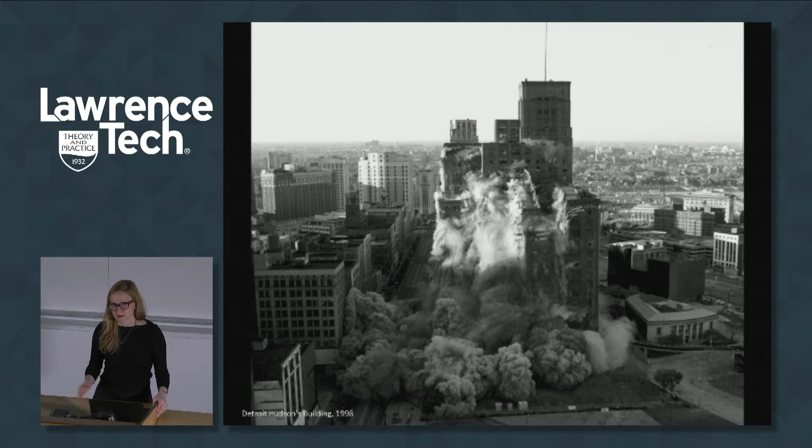For those who remember or read about it after the fact, it was a very public event. The mayor at the time imploded the building, it was televised, celebrated as a Renaissance, Detroit Renaissance. But the building itself was a very strong cultural icon in the city, a huge department store site, and the site of the Thanksgiving Day Parade named after it—it had a real cultural legacy.

So when that was gone, this was what the city looked like when I left, around 2007-2008. That site was supposed to be the sign of a kind of rebirth of the city, a new investment in what the city could be, but it stayed empty for a very long time, and looked like this for years.

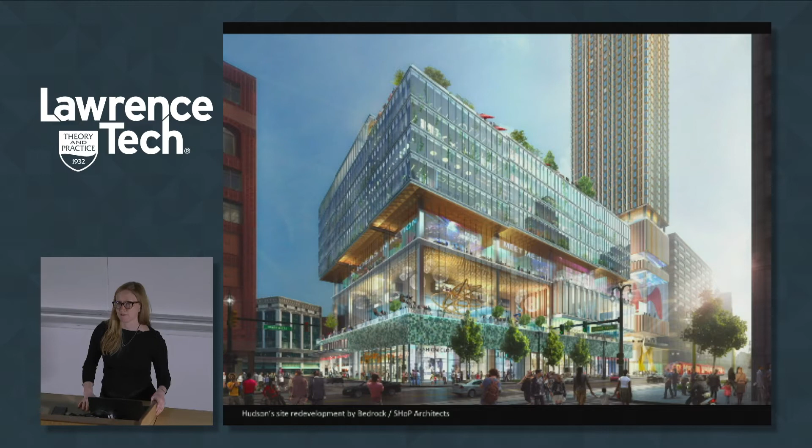Until very recently, when SHoP and Bedrock are developing now a plan for its regeneration. So the city goes from looking like that empty image when I left to almost the same view now, albeit through a rendering.

This is one part of a much more complex story having to do with industry and decline of industry, and a sort of perfect storm of things happening over the decades of the 20th century. I think Detroit became so interesting for people because it was such a rapid transformation, and it's coming back for me now—it's almost a different city, the way the development has caught up to that ambition of 1998, 20 years ago.

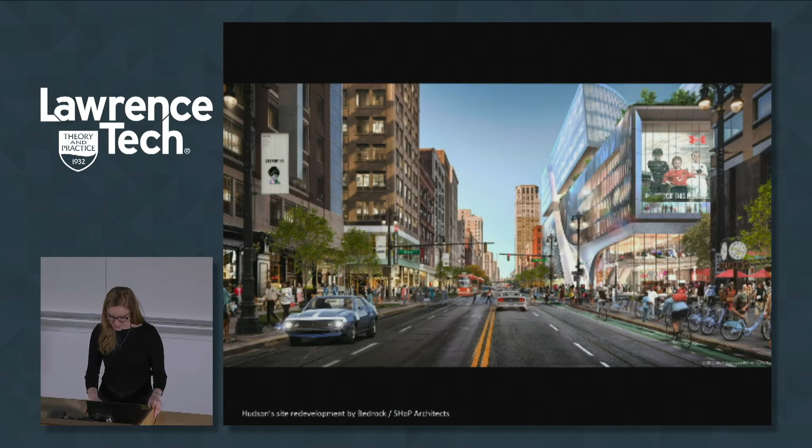So I've been thinking about that quite a lot, and then I got to Melbourne. Melbourne was interesting to me because for 7 years in a row, Melbourne, Australia got—I can't remember who gives this award—but the world's most livable city. It was always Vancouver and Melbourne competing for that title.

There were all these successes of the city in terms of culture, education, and design—they often call it the design city. There's some really interesting architecture, really experimental projects. But there was a study done about 2 years ago by someone working for the planning department of the city, worried about this boom and what it was going to do to the prized livability that Melbourne always defines and brands itself by.

There are sections of this part of the city that are more dense than Hong Kong, partly because there was very little, if any, planning regulation, apartment regulation, or regulation of the quality of buildings and living spaces. None of that was really regulated until this time—so it just took off.

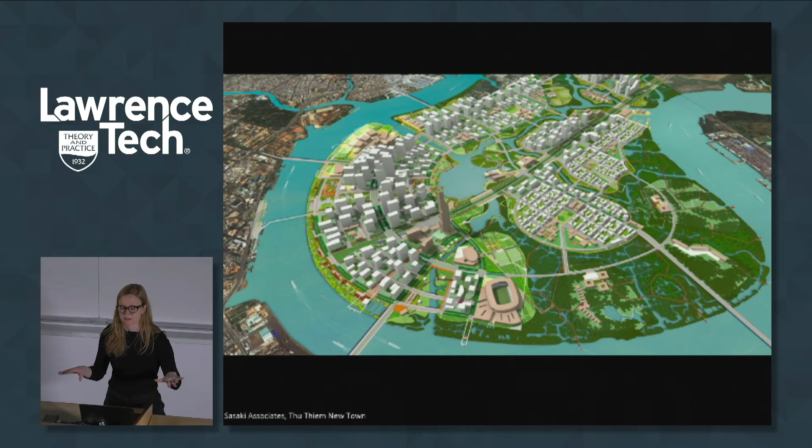So the new models of development are very much imported - Sasaki, SOM, Singaporean, Japanese planning firms. The model for the new Ho Chi Minh City is quite explicitly Singapore. I don't know how many of you know Singapore, but very, very organized and very new. Everything is sort of just - these are greenfield sites - so it's just razing essentially what's there and building everything new.

And the architecture is of a sort of podium tower type, really nothing to do with some of the existing systems of the city that are there, which isn't essentially a bad thing, but it does create problems when those two things come together.

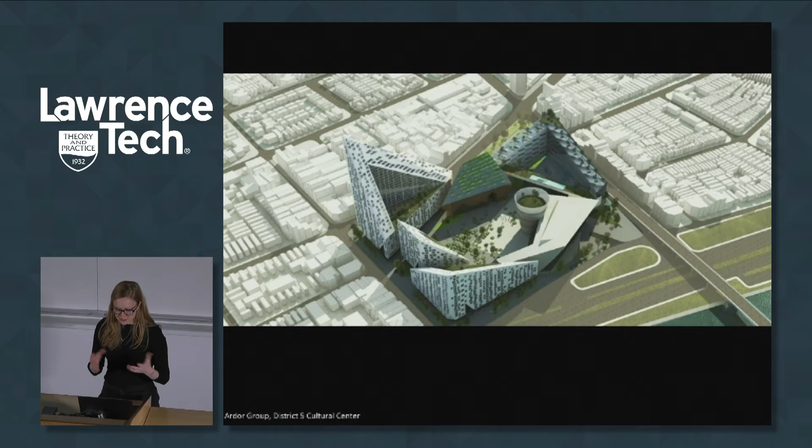So these are these new models. This is all sort of happening right now, which is why I spent about 2 years living there and was traveling there quite a bit before that, and have seen - not unlike how Detroit has changed - Ho Chi Minh City in the past 5 years has changed quite a lot.

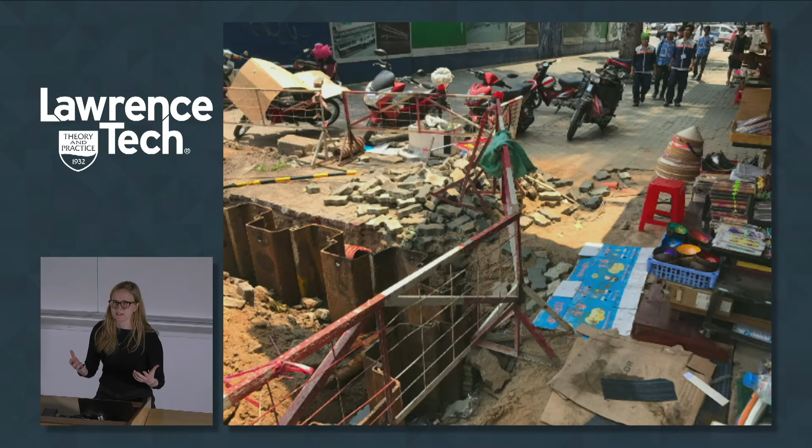This quality of unfinishedness - the more that there's potential for these, the more that it changes, the more potential there is for new models of architecture at an urban scale to intervene.

The sort of irony in the case of Ho Chi Minh City that I find interesting is that as this development is happening, there's an incredible amount of demolition.

It's sort of the opposite of Detroit, where the story people want to tell so much about Detroit is its decline, and it's that thing about the industry that built it being the thing that undermined it. Here, the quality of its demise has now become the thing that's going to save it. It's become a marketing and branded condition. There are many examples of this because there's so much retail, commercial, and art space coming into the city, which is not a bad thing—it's just a bit ironic, the subject matter it's now displaying as itself.

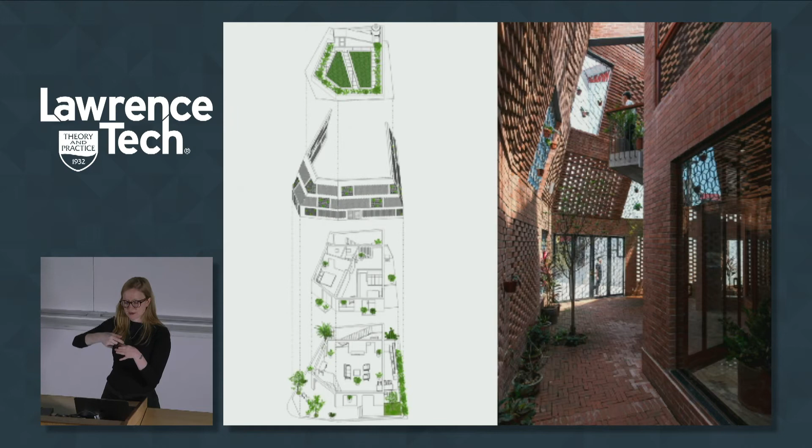So this is a building within a building where they've taken basically one shape and wrapped the inner building with an outer surface, and you get this gap. I could show you actually in plan - there's the site. You have basically one surface that wraps around itself and then is effectively extruded up. The outside is tipped in a bit, so you get these gaps essentially between the outer shell and the inner shell, which is a way of establishing a kind of privacy.

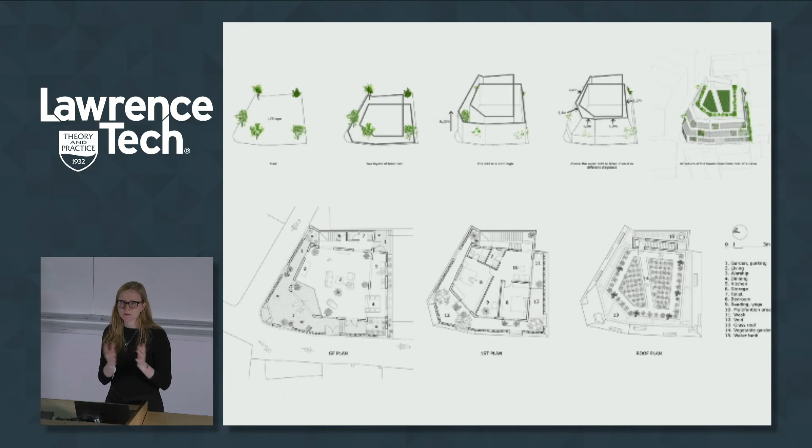It's a way of allowing light to come in interesting ways. This is that gap space between what is really like the public facade, the urban scale facade, the urban city, and then this sort of almost like a laneway, again a space that you can wander into, and then the more private inner space of the core of the building, all through brick.

Atelier Toa also, I think, is doing some really interesting, sort of similar ideas about having a building, in this case, a building over a building. So this is an existing house that they owned outside near a farm, and actually near a mine, and just let it sit for 20 years - they hadn't been there, and it was basically falling apart. But they wanted to go back and stay there, so they did a similar thing, putting effectively a greenhouse over the existing building.

And so you get these really interesting gap spaces between the outside shell and the inside shell. There's this common theme of bringing the outside in, the inside out, and finding a way in which that boundary is quite porous, but also one of privacy. These are all, again, reinterpretations of things that work quite well in existing housing. This is like a very common residential building in the center of the city, where you'll have some sort of a screen, a little kind of balcony or laneway or something that's semi-private, and then the housing next to it.

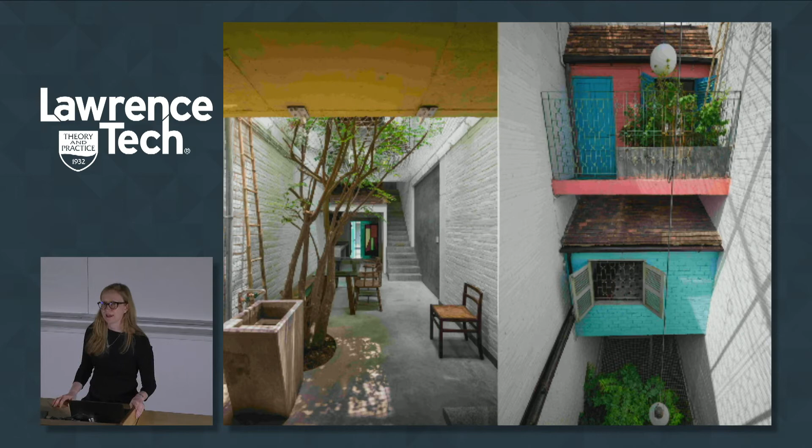Common in other ways too, where you have lots of really beautiful gates, and the world between the city - a very thin boundary - but the world between the city and the interior of a site being very, very different. A21 Architects is another firm I've been really enjoying. They're doing quite amazing work in the city, in Ho Chi Minh City in particular, again taking cues from the more vernacular fabric of the city, but doing it now in a way that's new, allowing for density on very narrow sites - highly dense development infused with a really high level of density in terms of amenity as well.

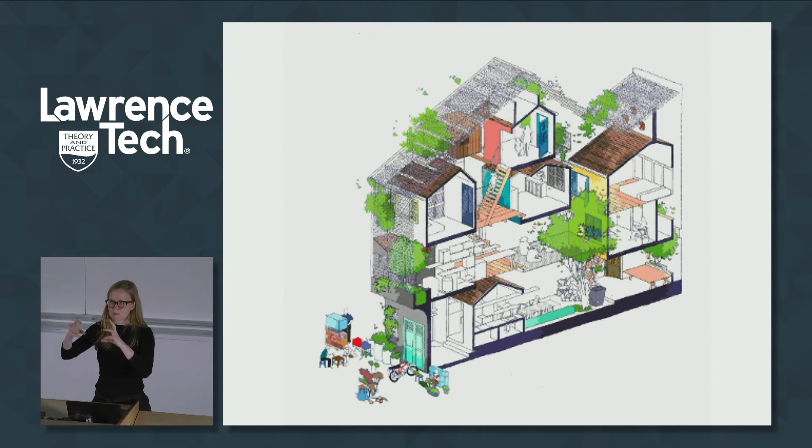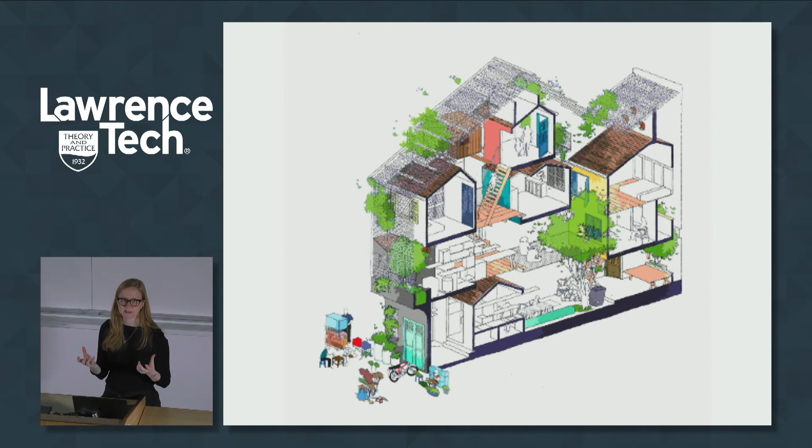Looking at the existing site, this shows it a bit better - taking this narrow site and chopping it up into a series of little mini houses, each being like a room, like a house but a room. By stacking them together in different ways in section, you get gap spaces filtering throughout the house, almost like hems - they become the public space for the family, with private spaces or little houses for each family member stacked vertically.

You can tell how narrow it is - they're incredibly narrow, but the way they let light in, the way you get gaps between each of these rooms, makes it feel much more expansive.

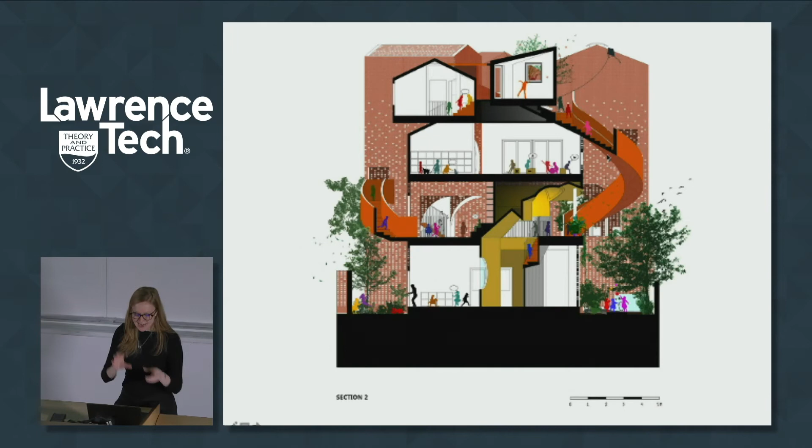In a similar project by a different firm, this is actually a kindergarten, taking clues from the existing scale of residential development and stacking that together. It looks like a slide - it should be a slide, but it's a stairway - stacking these together and using the gap spaces between them as circulation, sometimes as classrooms, sometimes as playgrounds.

All of these spaces start to be both inside and outside, using color and material in a really interesting way. This is the last project I want to show - these are all examples of what's happening there. They've emerged from a very acute awareness of light, color, texture, spatial and infrastructural sensibilities, but in a very new way. For me they feel very like Ho Chi Minh City, where I've spent the most time, but in a way that is quite new - it could be a new development by one of the larger planners, but it's still keeping some of those qualities and scales of space that you find everywhere.

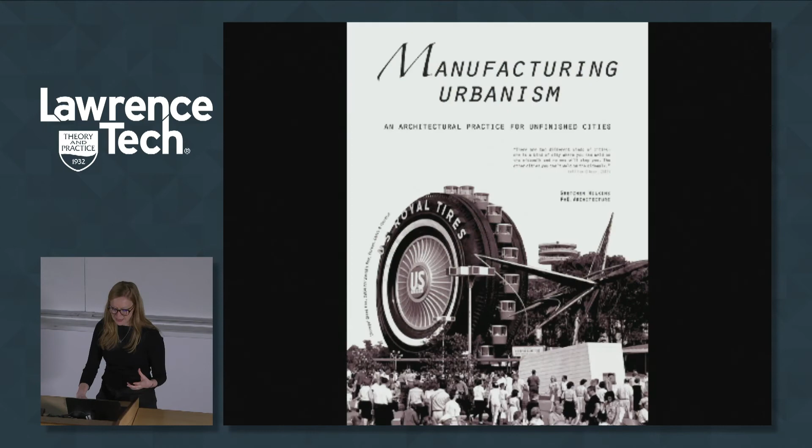That's just a sampling of things happening in the city that I think are both beautiful but also cued into a sensibility of that place, and a new form of development. The more architects can proliferate those sorts of models, the more there could be a way of integrating developer-driven, market-driven development models with these new ways of thinking about housing.

As Carl said, my PhD was all about these questions of architecture in the city, very much coming from having been in Detroit or around Detroit and seeing how the city has changed, and making these sorts of comparisons to other cities.

I've been really interested in industry and making, and how the economies and programs of making—whether manufacturing or agricultural production, any sort of production of things in the city—can be a resistant model of development, because it's usually the thing that gets pushed outside of the city as service economies or knowledge economies come in, and effectively homogenized. That's what Detroit was in the other direction: a mono economy of only industry.

So finding ways in which manufacturing and making and production can be integrated with the city, with knowledge economies and service economies, with universities, with public space, is something I've been working on quite a lot in both my own work and in teaching.

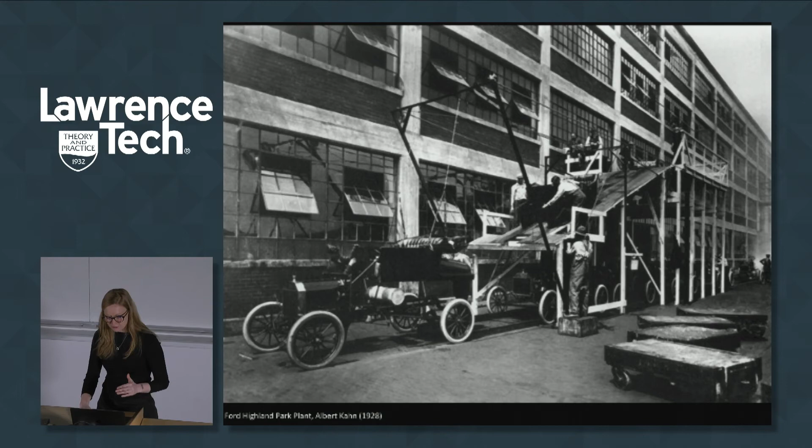So some of that is asking: what is the architecture of a factory? One project, a series I've put under the banner of Future Factory, looks at the factory building type and how it's transformed from the vertical factory to massive sheds—in that case in China—to robotics, and buildings that don't need to house people, and what implication that has in some human or public way, which typically it doesn't, but that's been my interest again in that question of boundaries. How do you think about openness or publicness to something like a factory building?

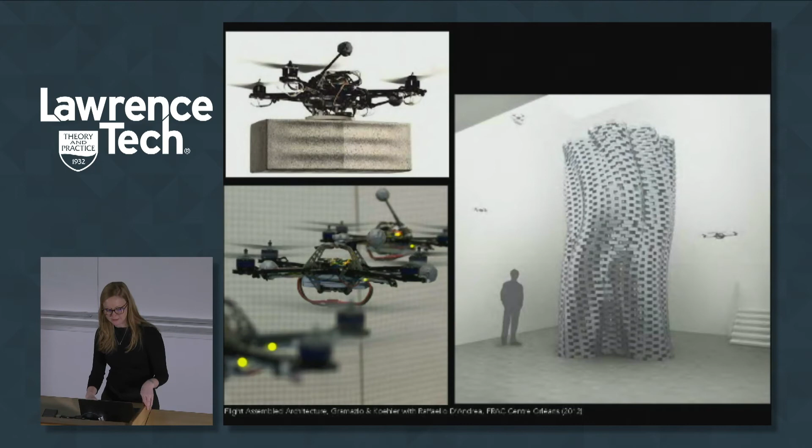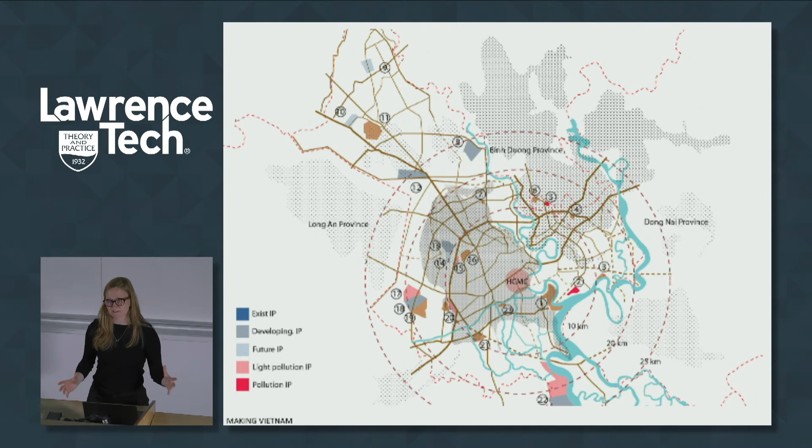One project I was working on with a couple of colleagues we called Making Vietnam. We looked at many different factory sites around Ho Chi Minh City—the dense central factories, those on the periphery of the city, and those much further out that were more like factory towns. We looked at the prevalent building and housing units and building types, mapped those, and tried to find a way to think about these prevalent building types as a factory type.

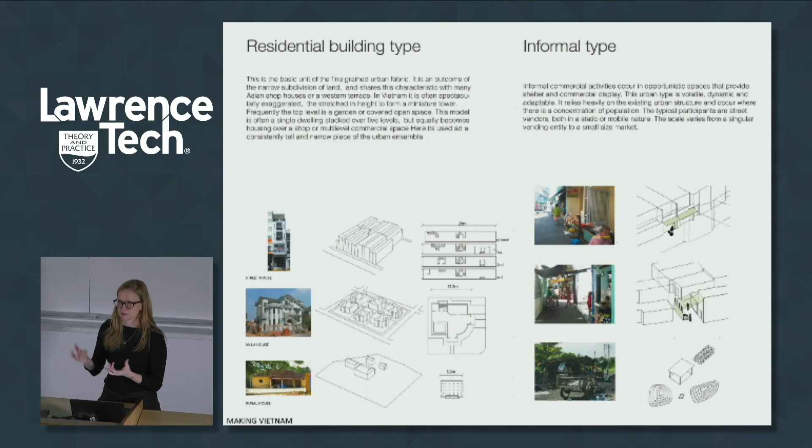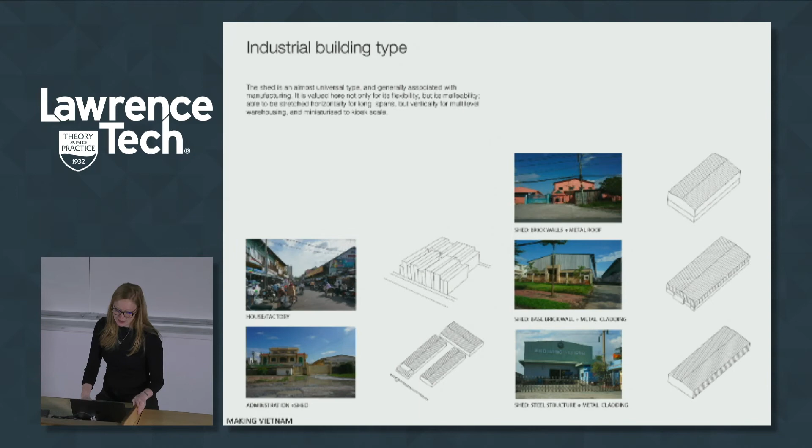So instead of taking a traditional factory and asking what else could go in it, we asked how you could think about what the city fabric already is and integrate factory or production into it. We looked at residential, informal, and industrial building types—how big they were, what they were made of—thinking of them as effectively a building block, then used those to devise different production space strategies for the central density, the perimeter area, and the outskirts.

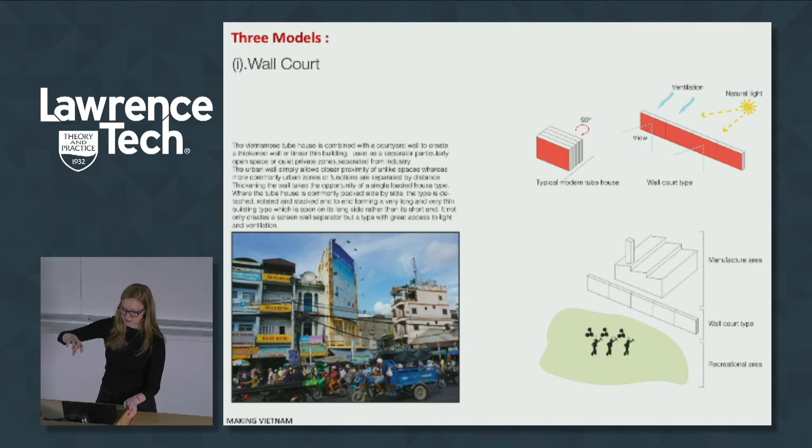One example was taking the tube house—these narrow, tall, long buildings—and instead of packing them side by side, stacking them end to end so they become a wall.

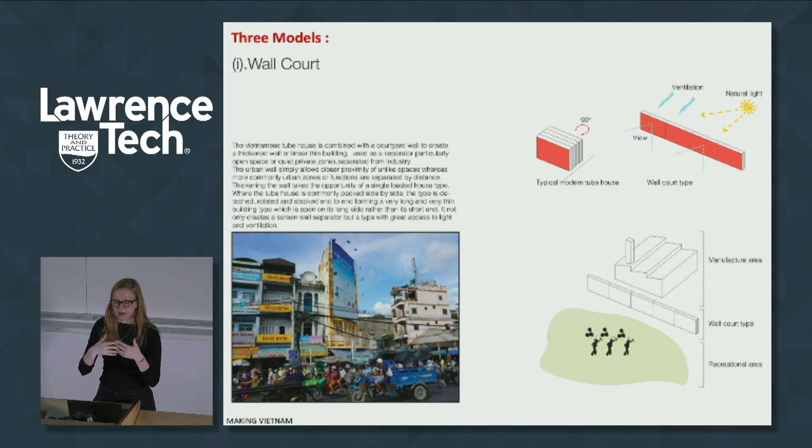That wall could be used as a kind of boundary or buffer between a quite traditional factory building and public space. So it's like using residential as a filter between the two that could relate to them, but doing it in a way that's more like a wall or barrier.

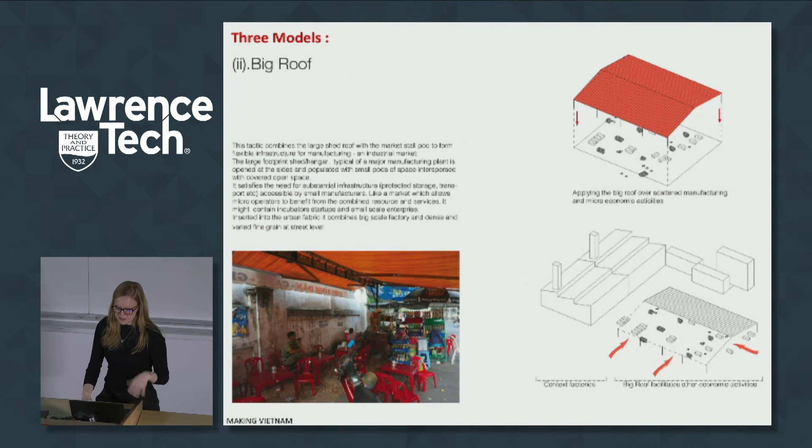Without going into too much detail, there were three ideas. The other one was this big roof idea, this idea that shed buildings, factory buildings often have these cheap, light giant sheds. But under that shed you could put any number of other building types or programs. These were more analytical, and then there were some design models we did.

Instead of taking the two buildings end to end or as a wall, we called it street teeth - like gaps in your teeth, where you'd have a porous boundary between factory space and public space, or urban space and factory space, but allowing other things to fill in the gaps.

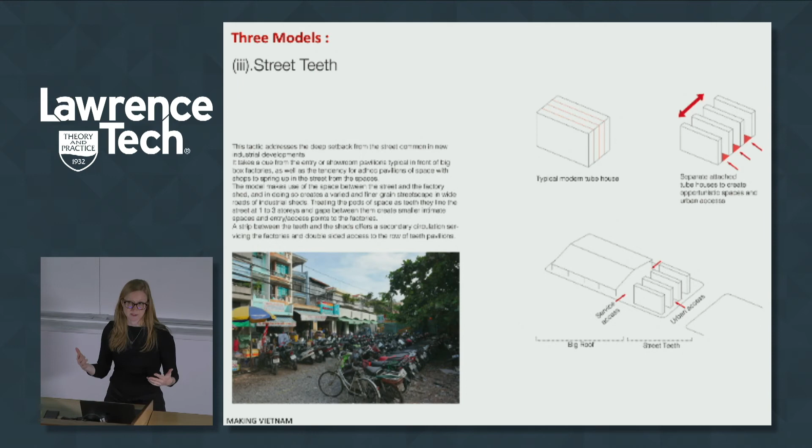One of those we tested across these three sites was the big roof idea - thinking of the building just as a very light shell that could expand or change shape depending on what it was around. In the center city, this was an example of what that might look like as a vertical production space.

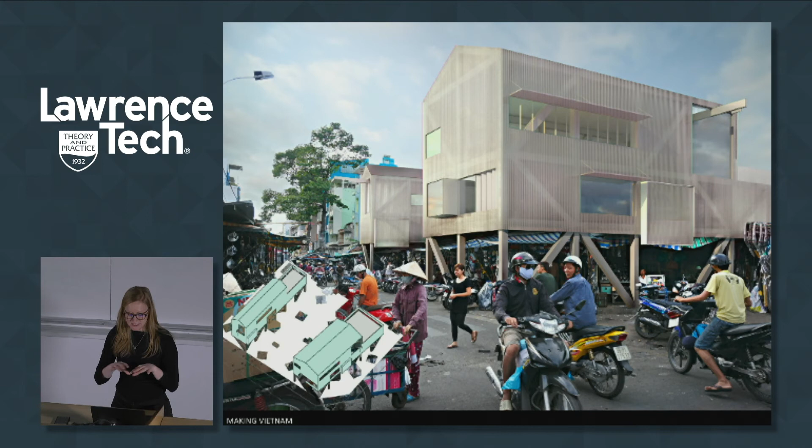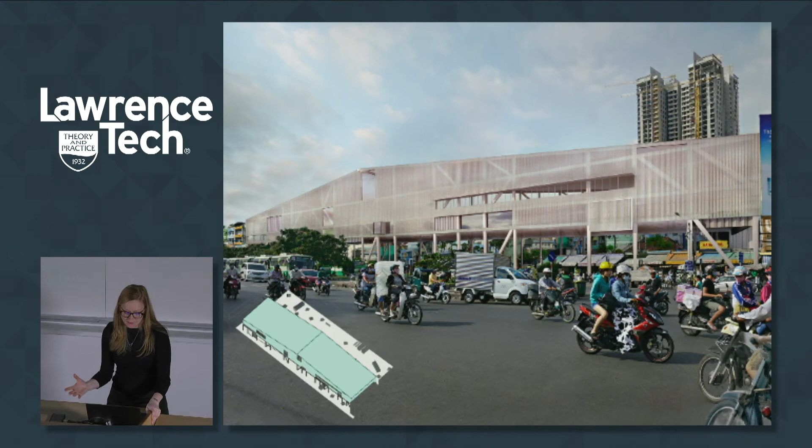On the perimeter of the city, we thought about it more in terms of sheds elevated up, so the street activity could still happen, but you'd have residential, factory, and public spaces above in these three sheds. In a place with a lot more space, it could become much more expansive, again with lots of things filling in underneath.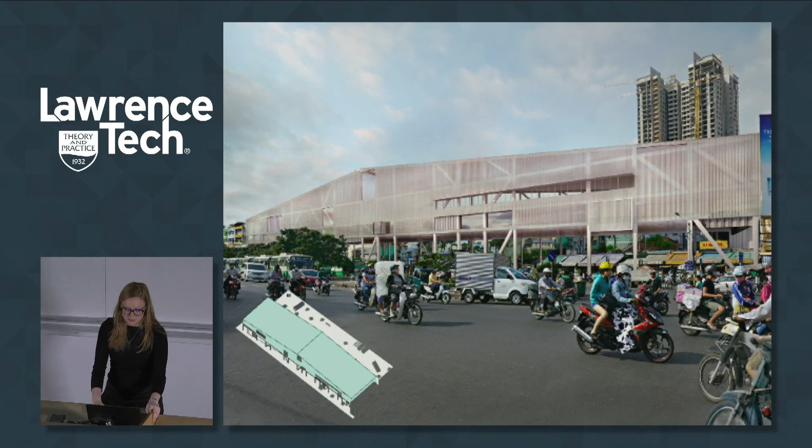That was a speculative project we did, these colleagues of mine, while spending a lot of time going back and forth between Ho Chi Minh City and Melbourne.

Around the same time, I started running a series of design studios called Future Factory, where we looked again at the building type of the factory - what could it be? What is it, and what else could it be? What are the other ways you can test the production of things in residential space, for example, or public space?

This was actually a competition that the Storefront for Art and Architecture had, called the Competition of Competitions, where you had to come up with an idea of what you thought was a pressing issue for architecture and cities. I entered with this, which was shortlisted and included in the exhibition - the idea that the Future Factory is something we need to reconsider in terms of urban sites.

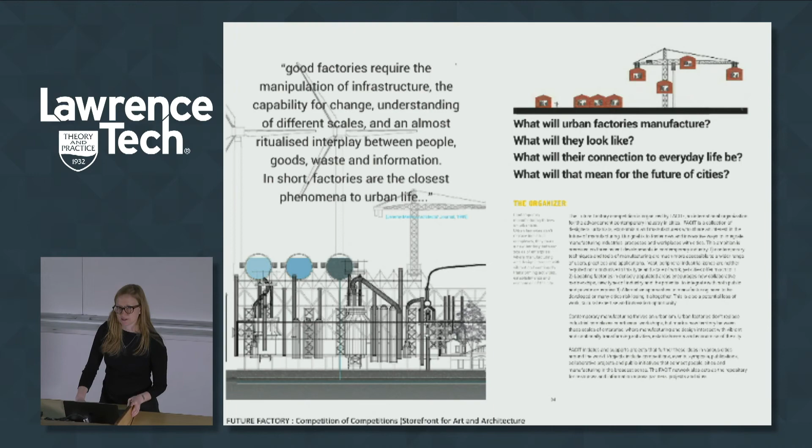I went through, and a lot of these questions were meant to seed what an architectural resolution of that project might be. That's effectively what I was then running through teaching in master studios, and with major project students or thesis students interested in this same question.

We took that on in Melbourne, looking at sites where production could start to come back into the city in the denser parts. These are now student projects, Master of Architecture student projects, looking at factory buildings in Australia in particular, and often generally in Melbourne.

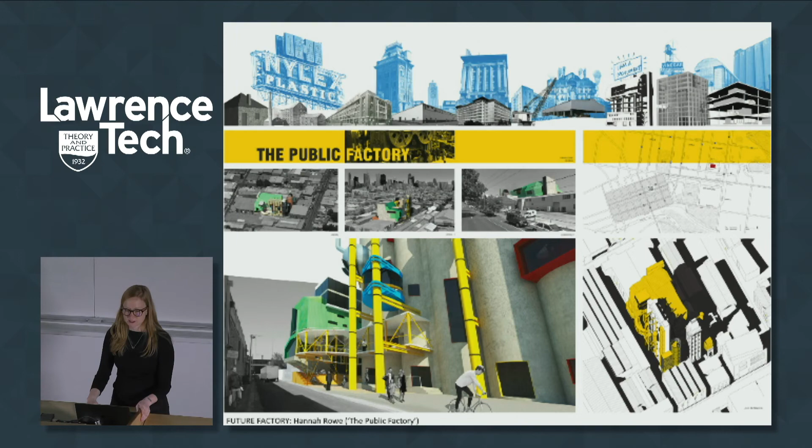Hannah's project, which she called the public factory, was very much interested in the idea that you could inject public space or somehow bring the city into a factory in a big public way - not necessarily just maker spaces, but how it actually starts to agglomerate other urban programs around it, or integrate with programs already there.

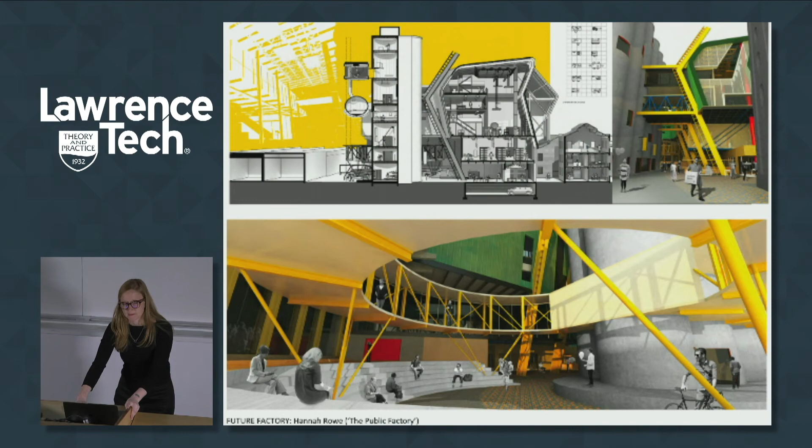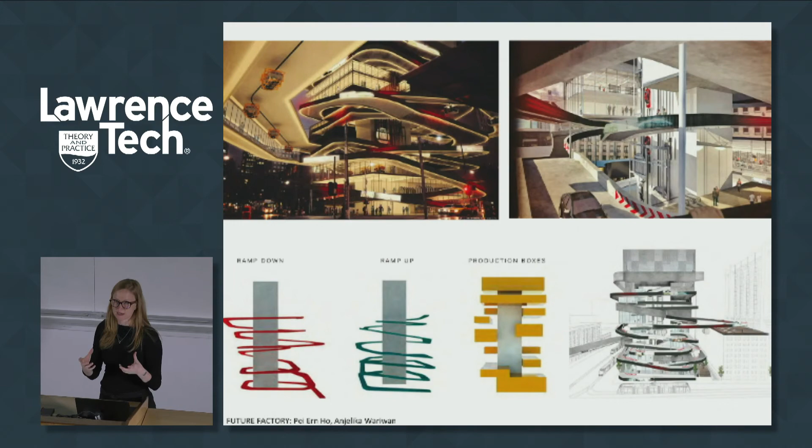This project was by a team, and they were looking at speculative projects where they'd take existing industries or make up industries they thought were coming. In Australia, the auto industry has been a difficult topic because of so many plants closing around Victoria. So they looked at the auto industry and how customization of cars could happen in a public, almost spectacular way, by wrapping the vertical factory around the outside of the building rather than historically on the inside.

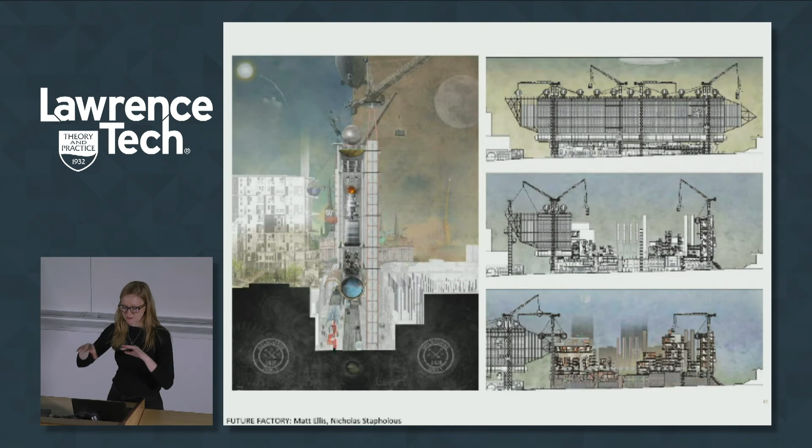Then at the scale of the city, this was more of a futurist Archigram approach to thinking about the city constantly making itself as it moves through different spaces of development. So the perpetuation of construction is always present, and the city itself is making itself depending on what sites are under construction, bringing those together in a living way.

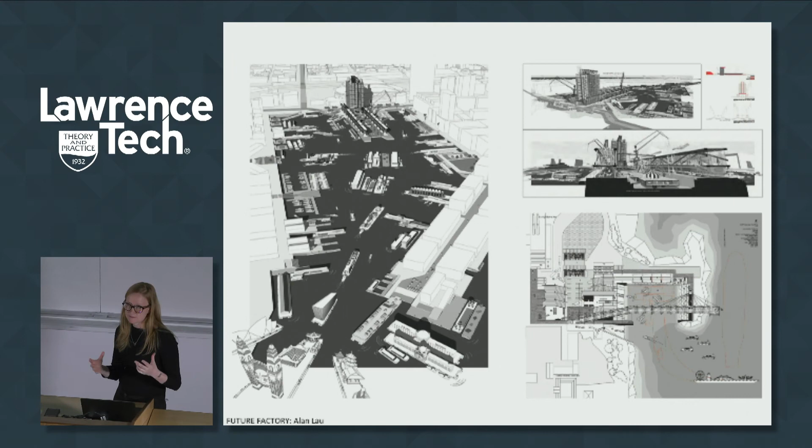Finally, this was a major thesis project looking at the port, similar to Detroit, where those infrastructural, industrial areas often get taken over into more commercialized programs. He was thinking about the floating city, the idea that you could move these things around and have a space of the city that's constantly basically mobile programs. Those projects were more about making in the city.

Then we looked at, through design studios and teaching, making from the city—this notion, not unlike the A21 projects, of recycling building products in the city. This was a project we did as part of the London Festival of Architecture, where we worked with Laminex, and then it was a series of studios.

We worked with Laminex, the laminate material company, and also with Austral Plywood, Dunlop Foam, and an aluminum industry company, basically as partners. They donated their material, and then we developed ways to repurpose those materials into some sort of architectural space or pavilion. They all had to be flat-packable so we could pack them up and ship them to London, where they were installed in different sites as part of the London Festival of Architecture.

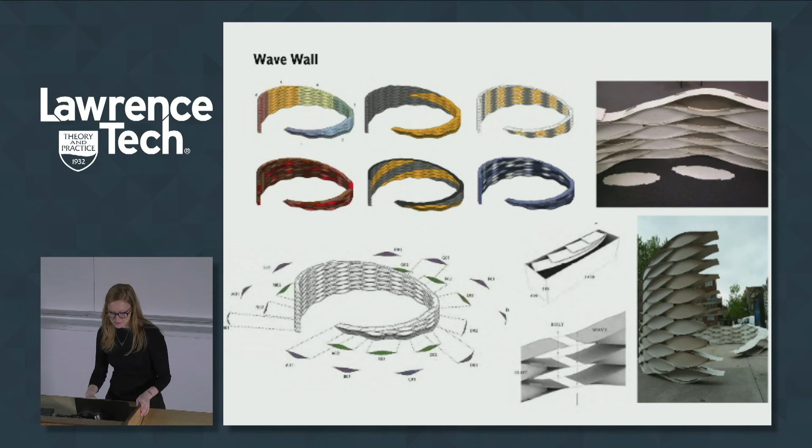So this was a few of those projects out of Laminex. This one looked at units of very thin, brittle material—almost nothing you can do with it structurally, except think about it as puzzle pieces or small units that come together. This was a series of pieces about this big that could be constructed into a little pavilion wall. These were all urban installations, more like urban furniture.

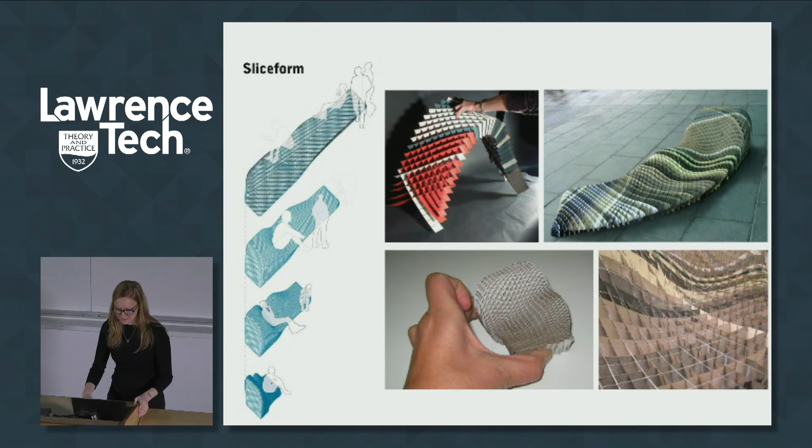Then this one was a bench with a concertina pattern, a series of waffle pieces that could expand and contract, creating a space for 1, 2, 3, or 4 people. It looked a little bit like this, and it wasn't the most comfortable bench because it's pretty sharp—we cut our hands on it quite a lot. But it did work: it contracted to about this big and expanded out to about 11 or 12 feet, and you could move it around like a snake.

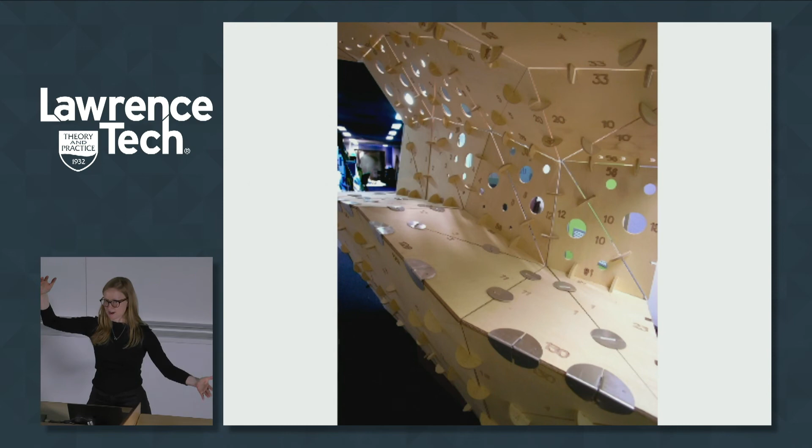At that scale, the pavilion, there was another one looking at offcuts. They always were small units because the idea is if you're going to reclaim materials, you don't have full sheets of anything, you always have these weird offcut material shapes. So how do you use that in a system that allows it to fasten itself? Making it lighter, cutting holes on it, those cuts then become the joints to fasten together this triangulated pavilion, which was enough space for about 3 or 4 people with a built-in bench.

It looked like this. And then the last group of projects is at the biggest scale, which was, okay, well, how do you make the city?

This, as Carl mentioned, while I was working overseas in Australia and Vietnam, I set up an urban design program, which was an outgrowth of an area I coordinated called the Urban Architecture Lab. That was always, I thought, the much better name, because urban design has a set of associations that it could be many, many things, and therefore nothing at all. Urban architecture was quite explicitly thinking about architects or landscape architects working on a discrete project that has an implication for the city, as opposed to trying to think about the whole city at the same time, or a kind of master planning scale.

So as part of that, the program was set up. It had 3 cities that, if you were a student in the program, you did a design studio in each of these 3 cities, which was conveniently where RMIT has campuses: Barcelona, Ho Chi Minh City, and Melbourne.

I curated a series of design studios, elective classes, and seminars that were all trying to get at these different questions of cities that we could then test in the different locations. So someone would do a design studio in Melbourne, and then we would take that same subject matter and look at it in Barcelona and in Ho Chi Minh City, through these different formats of teaching. It was an interesting way of setting up a question, but then comparing it — I'm very interested in comparing how cities are unique individually, but there are so many things you can learn by looking at the same question at a different phase of its development, like the intro slide I was talking about before.

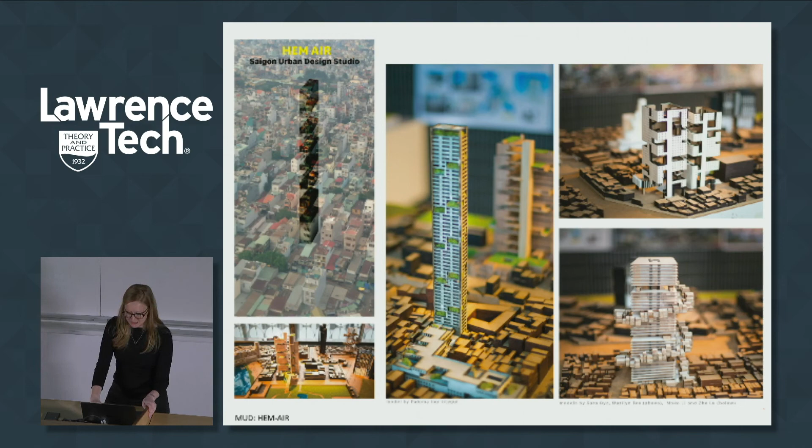So these were some of the student projects looking at the combination of these interior and exterior spaces — a lot of the things that some of the earlier projects I showed were trying to do, but at a really extreme density.

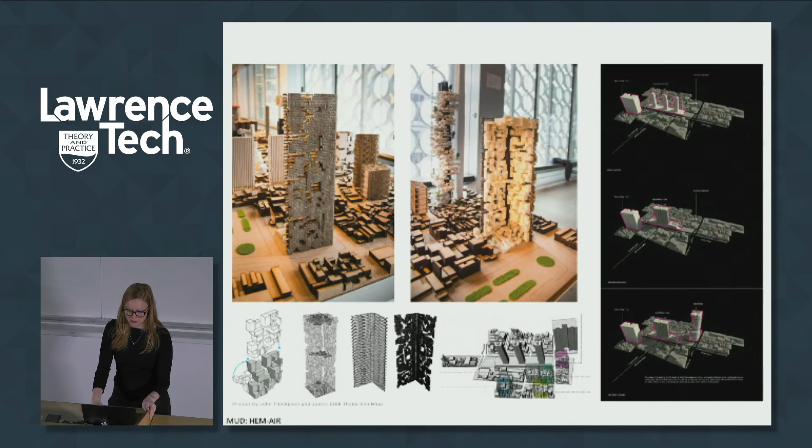And then lastly, this question of how do you make the city. This was a quite different sort of project. It was a drawing project that was a collaboration that I set up, but then brought in 24 people, 23 other people into.

The question was, if you were to draw, how do we design cities? How do we draw cities? What information do we need to communicate in order to think about new ways of intervening in cities? Because we don't actually design a city, right? It's a combination of designing things and building things and then responding to that, and something gets torn down. It's such a kind of unfolding process.

If you were to do a construction document set like you do for a building, but for a city, what sort of information would you put in it? What are the metrics of the city that are important? What are the qualities of the city that are important? So it was taking this thing that we have in architectural practice, which is communication of information and planning out all the qualitative and quantitative sets of information in a drawing. How would you do that at the scale of a city?

So I started it with a drawing, and then it was put into a book, and the book got mailed around to all these different participants in different parts of the world so that they could look at their city and their practice. It was mainly architects, but also landscape architects and artists. They each had to do a drawing, which was effectively a version of a construction document for their city, and then mail it on to the next person. It went around, took about a year, starting and ending in Melbourne and going around to these cities around the world.

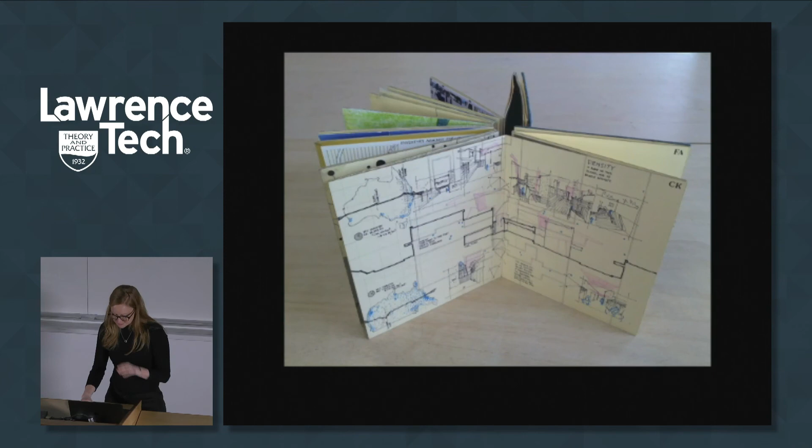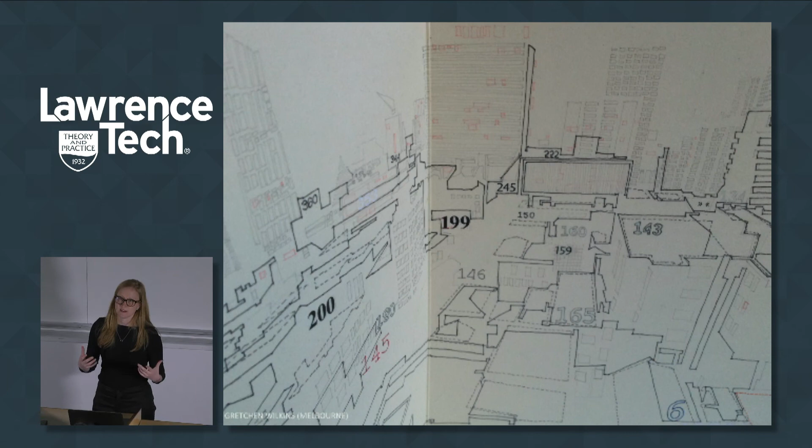So this was the drawing I did, which is the one that was used, the other version of which was used for the poster here, a drawing of Melbourne, looking at questions of address, like how there's so much in Melbourne about what laneway you live on or what street you live on, and the prominence of that and the identity that people have with different streets and buildings. So what if you were to communicate the metrics of the city and the lineament of the city in a different way? So it resembles the city and draws the boundaries of the city, but doesn't actually look like it.

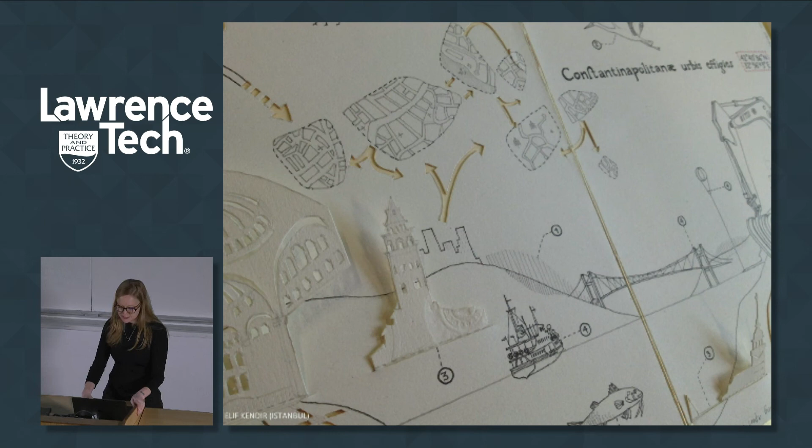Some other versions of that. This one was looking at Istanbul and the pop-up culture that she, in this case, thought was demolishing the qualities of identity of the city. This Jonathan Solomon did Hong Kong when he was still living in Hong Kong.

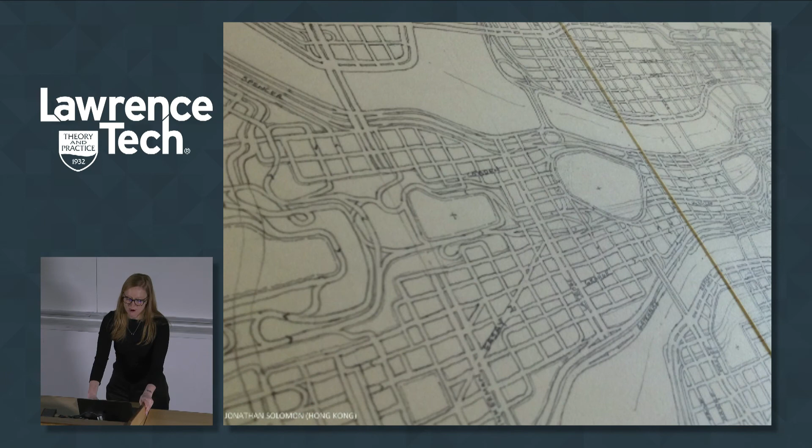Pablo looking at Pittsburgh and different ways of thinking about perspective, like these tunnels of vision, and perspective as the thing that could effectively design the city, or you could build the city around these different ways of experiencing it visually.

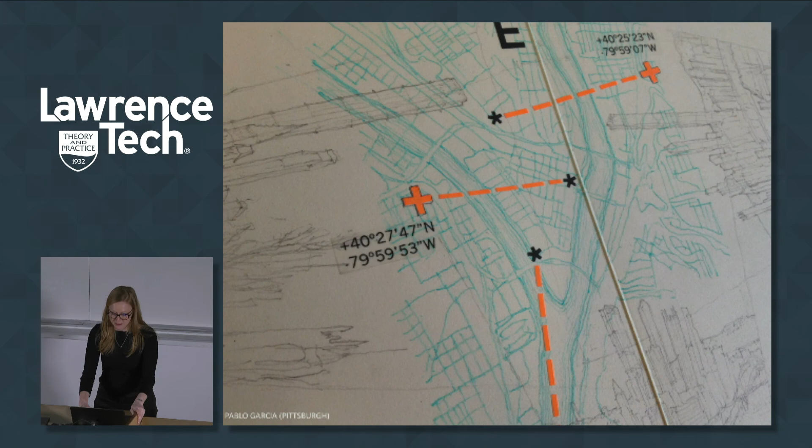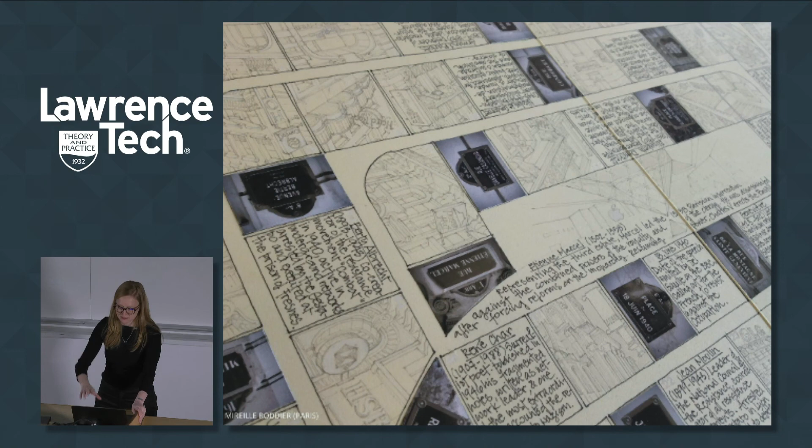And then, again, the other version of my drawing of Melbourne. So that's the last project.

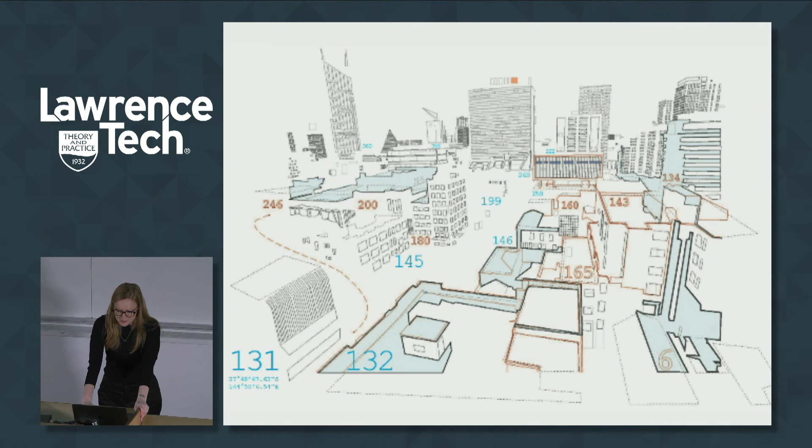I think, as Carl mentioned, now being here and working, just arriving back to this part of the world and being, again, still very interested in cities and those sorts of questions, that's been what I'm seeding in the short time I've been here so far, 6 months, but seeding to connect the program at Cranbrook and our students with Detroit.